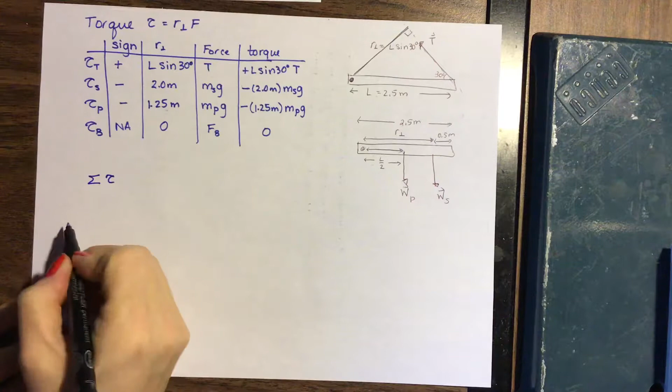So now let's use our Newton's second law expression that when our post is in equilibrium, it means that the sum of the torques is 0. So our torques, as we have listed in our table, all have to add up to give us 0. And as we write it, we include the plus and minus signs. Okay, so all those guys have to add up to be 0.

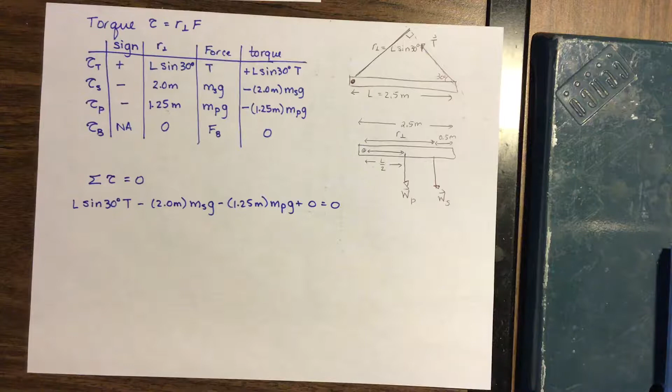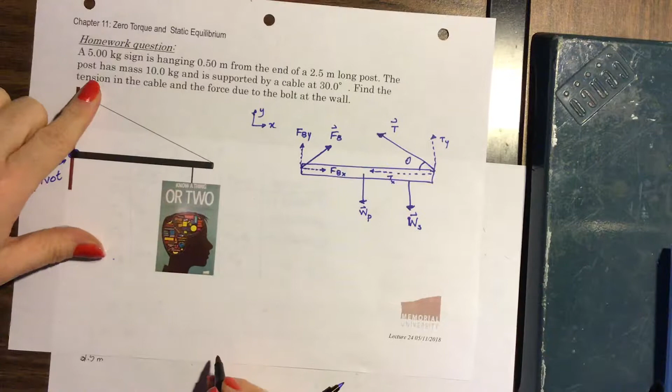Let's see if we can figure out what some of these numbers are. So if we look, we see that T is the only thing we don't know, and we can figure out the rest of the numbers. So let's just make a note of what we know. The length of the post is 2.5 meters. That's what's going to go in for L. 2.5 meters here. Mass of the sign is given as 5 kilograms. And mass of the post itself, the post has mass 10 kilograms.

So let's find the size of each of these numbers. Let's get those multiplied out. So our first one is L times sine 30. 2.5 times sine 30 gives us 1.25, and then that's times T, and the units there are meters, minus. So our next one is 2 meters times mass of the sign times 9.81. Gives us 98.1. The units here, mass times gravity, gives us newtons. This one is a meter, so we have newtons times meters.

Then our next term, we have 1.25 times the mass of the post, 10, times gravity, 9.81, to get minus 122.6 newtons times meters. So there's each of our torques right there. Those are going to sum to give us 0. So now we can start to solve it.

So then our tension, we'll bring these terms to the other side. So plus 98.1 newton meters, plus 122.6 newton meters. So I take this to this side, becomes positive. This to this side becomes positive. And then to solve, I have 1.25 T on this side, so I have to divide both sides by 1.25 meters.

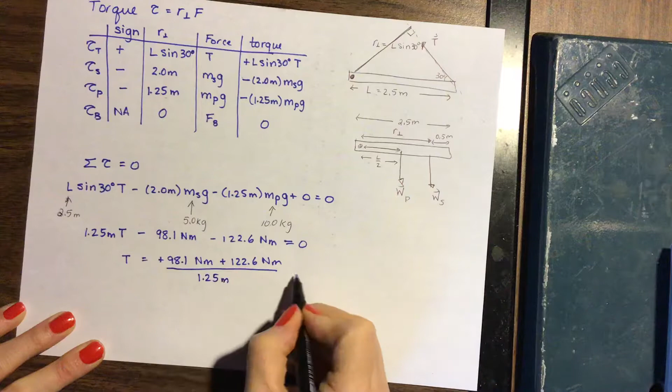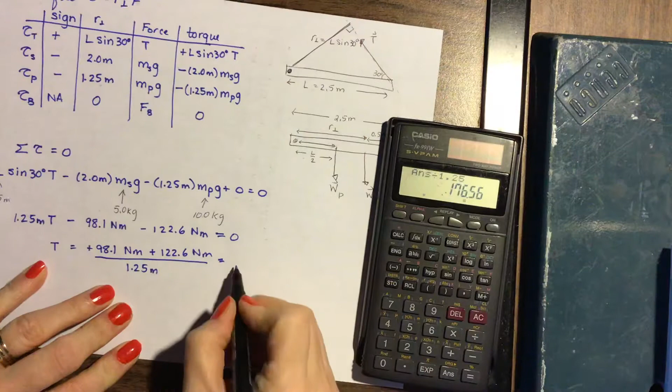Let's see what we get for our tension here. So 98.1 plus 122.6. Divide that by 1.25, and we get a tension force of 176.6 newtons. And the direction of that tension force would be along the wire, or 30 degrees above the post itself. So there's our tension force.

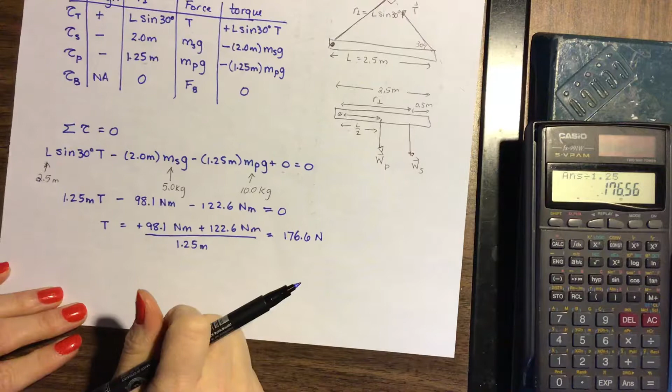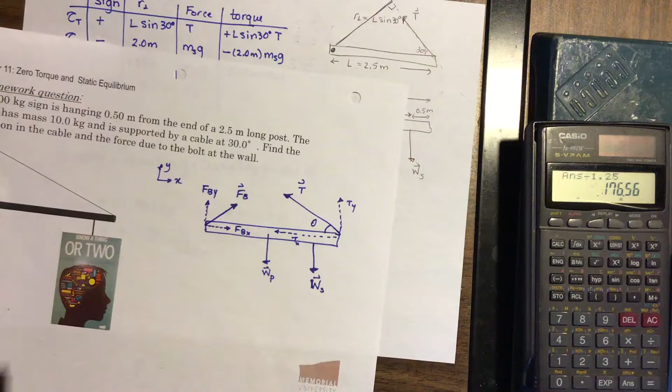We're not finished yet because we're also asked for the force due to the bolt at the wall, so we have to find these forces. So what we'll do to figure that part out is next we'll go to the fact that the sum of the forces have to be 0.